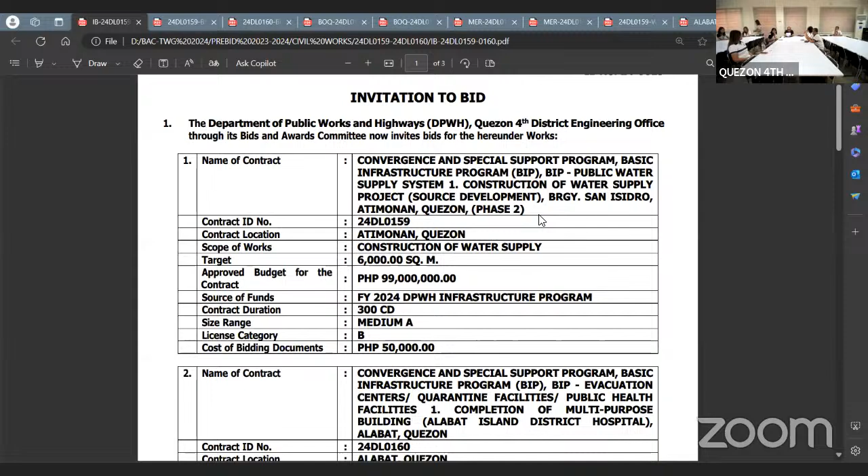Under contract ID 24DL0159 and 24DL0160. Majority of the members of the BAC are present. Ako pa ay online because of some reasons, pero they are online, as well as the representative from the contractors. Some are also online. So meron po tayo today to proceed with this activity efficiently.

So to hear the details of the projects, kanya po natin si Engineer Brian to discuss the details. Good morning for this day, pre-bid conference. Meron po tayong two projects for this invitation.

First contract ID 24-0159, Convergence and Special Support Program, Basic Infrastructure Program (BIP), BIP Public Water Supply System. Construction of Water Supply Project, Source Development, Barangay San Isidro, Atimonan, Quezon, Phase 2. Scope of work: construction of water supply, target 6,000 square meters. Approved budget for the contract of 99 million pesos. Source of fund: FY 2024 DPWH Infrastructure Program. Contract duration: 300 calendar days. Size range: Medium A. License category B, and cost of bidding document: 50,000 pesos.

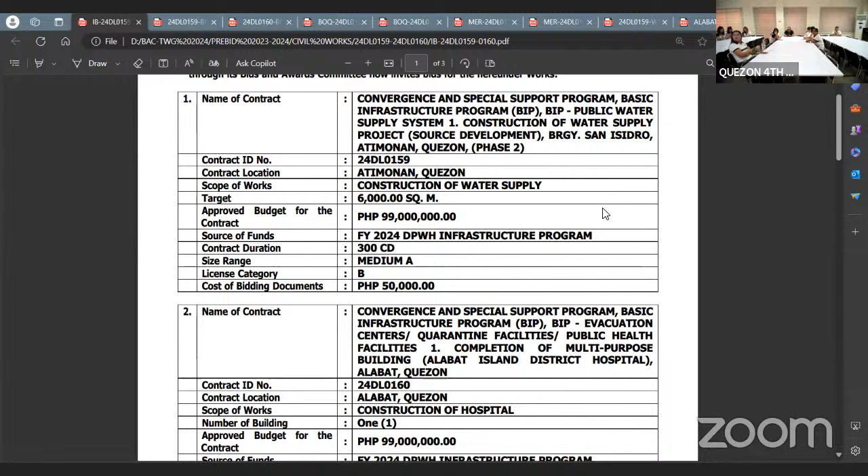Then second project, contract ID 24-0160, Convergence Special Support Program, Basic Infrastructure Program (BIP), BIP Evacuation Center, Quarantine Facilities, Public Health Facilities, Completion of Multipurpose Building, Alabat Island District Hospital. Scope of work: construction of hospital, number of buildings: 1. Approved budget for the contract of 99 million pesos. Source of funds: FY 2024 DPWH Infrastructure Program. Contract duration of 360 calendar days. Size range: Medium A, license category B, and cost of bidding document of 50,000 pesos.

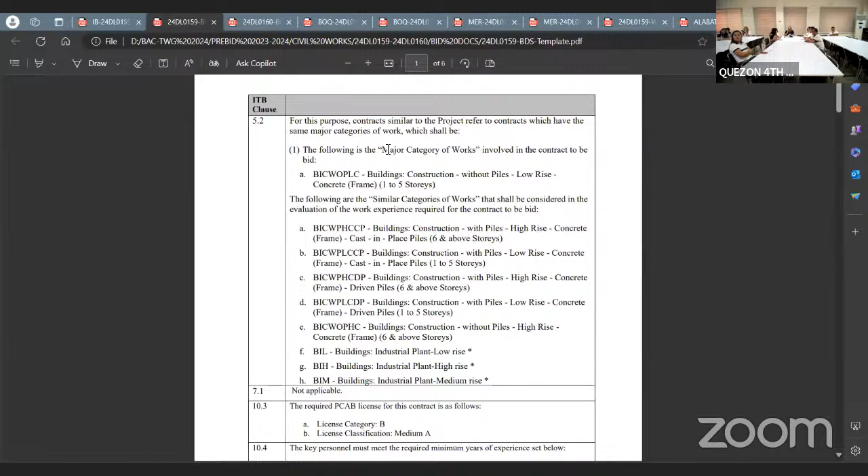So dalawa lang po yung project natin. Unahin po natin yung ating 24-0159. So for the major categories of work: building construction, without piles, low-rise, concrete frame, 1 to 5 stories. Ang major categories po is concrete frame na building construction, 1 to 5 stories.

Then for other similar categories: building construction with piles, high-rise, concrete frame, cast-in-place piles, 6 and above stories. Building construction with piles, low-rise, concrete frame, cast-in-place piles, 1 to 5 stories. Building construction with piles, high-rise, concrete frame, driven piles, 6 and above stories. Building construction with piles, low-rise, concrete frame, driven piles, 1 to 5 stories. Building construction without piles, high-rise, concrete frame, 6 and above stories, and building industrial plant, low-rise, medium-rise, and high-rise. So ito pong 24-0159 ay concrete frame ang ating required na category.

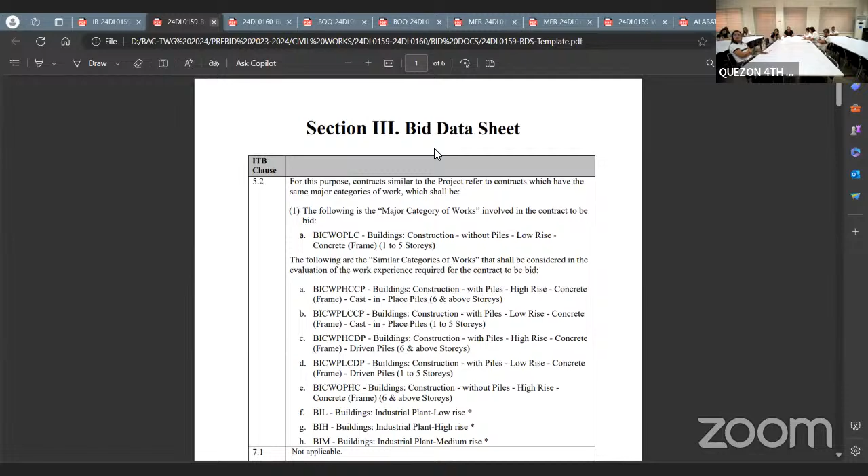Then for 24-0160, for the construction of hospital: building construction without piles, low-rise, steel frame. So steel frame naman po yung ating 160. So sa category ng project listed doon sa ating contractor information ng CRC.

So may mga bidders po tayo na pwedeng mag-fail, mislok po nila yung category kung steel po or kung concrete. So pa-double check na lang po doon sa mga interested bidders na sasali. So ating 24-0160 for the construction hospital is steel frame.

Then for the similar category: building construction with piles, high-rise, steel frame, cast-in-place piles, 6 and above stories. Building construction with piles, low-rise, steel frame, cast-in-place piles, 1 to 5 stories. Building construction with piles, high-rise, steel frame, driven piles, 6 and above stories. Building construction with piles, low-rise, steel frame, driven piles, 1 to 5 stories. Building construction without piles, high-rise, steel frame, 6 and above stories, and building industrial plant, low-rise, medium-rise, and high-rise.

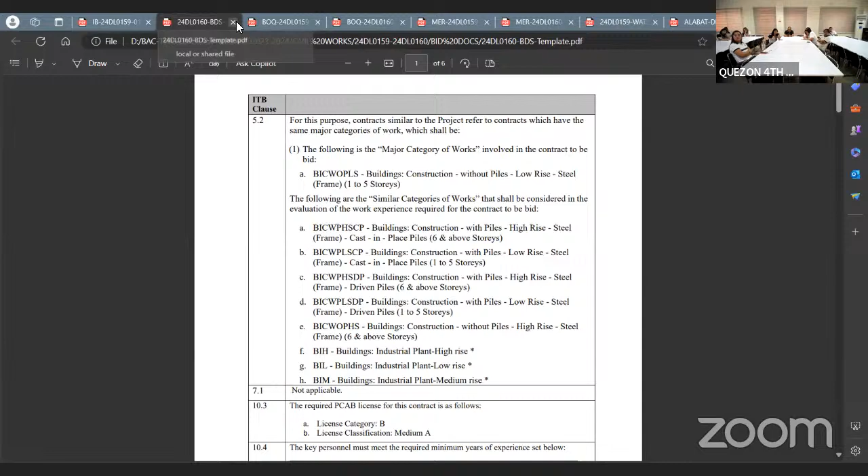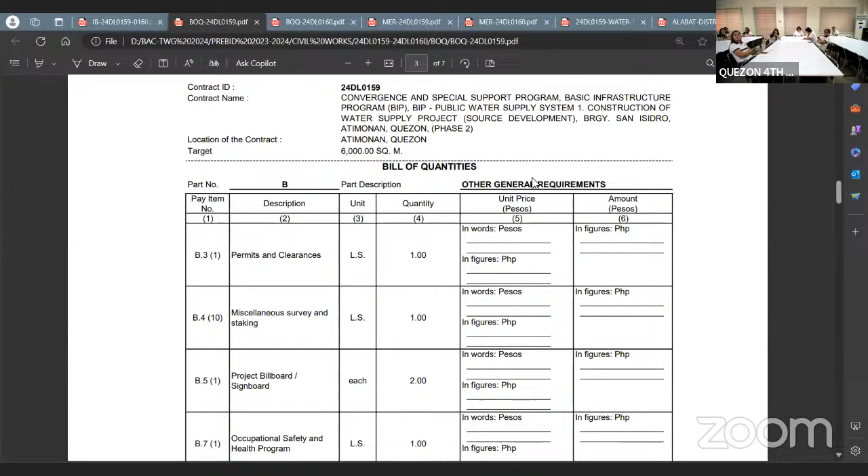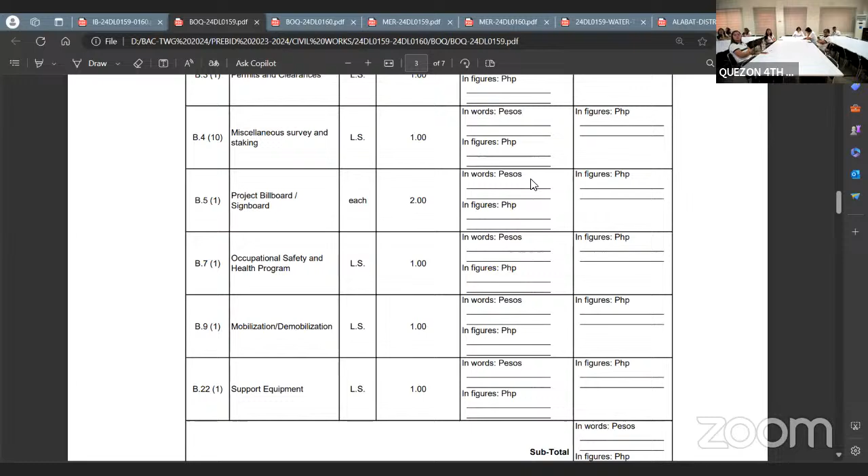Then for Part B, other general requirements: permits and clearances, miscellaneous survey and staking, project billboard, signboard, occupational safety and health program, mobilization and demobilization, and support equipment. Then for Part C: clearing and grubbing, removal of structure and obstruction, structure excavation common soil, embankment from roadway, structure excavation common soil, embankment from borrow common soil, then gravel fill, and site development.

Then Part D, reinforced concrete: structural concrete 3,000 PSI, Class A, 28 days, lean concrete, reinforcing steel deformed grade 40, and forms and false works.

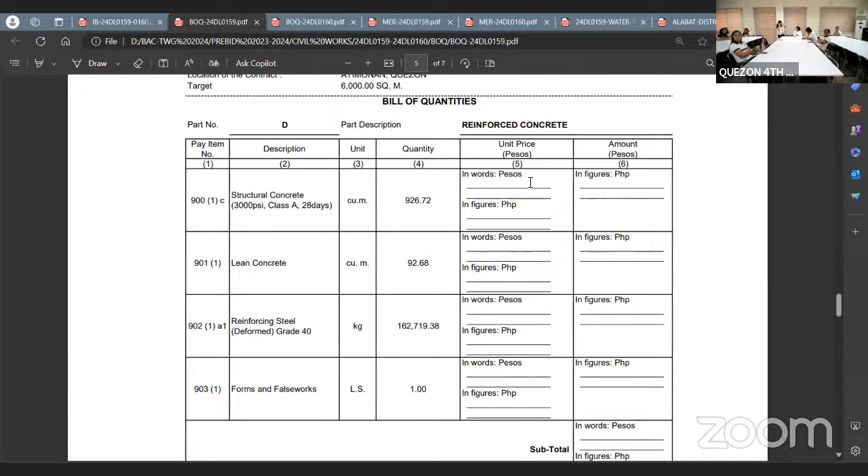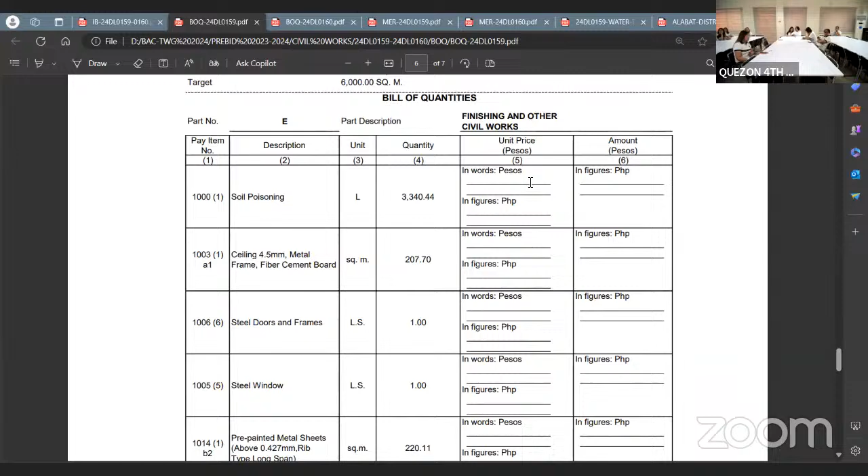For Part E, finishing and other civil works: soil poisoning, ceiling 4.5 millimeter metal frame, fiber cement board, steel doors and frame, steel window, pre-painted metal sheet above 0.427 millimeter rib type long span, waterproofing cement base, cement plaster finish, painting works, masonry, concrete, painting works, wood and painting works, steel.

Then stage beam and load bearing, including reinforcing steel, 100 millimeters, steel, structural steel trusses. So that is our requirement for 24-0159. Complete frame for our 24-0159. Then for the construction of hospital, contract ID 24-0160.

For the summary of bid prices: Part A, facilities for the engineer; Part B, other general requirements; C, earthwork; D, reinforced concrete; E, finishing and other civil works; F, electrical; and G, mechanical.

Part C, earthwork: removal of structure and obstruction, structure excavation, common soil, foundation fill, gravel fill and soil, and site development.

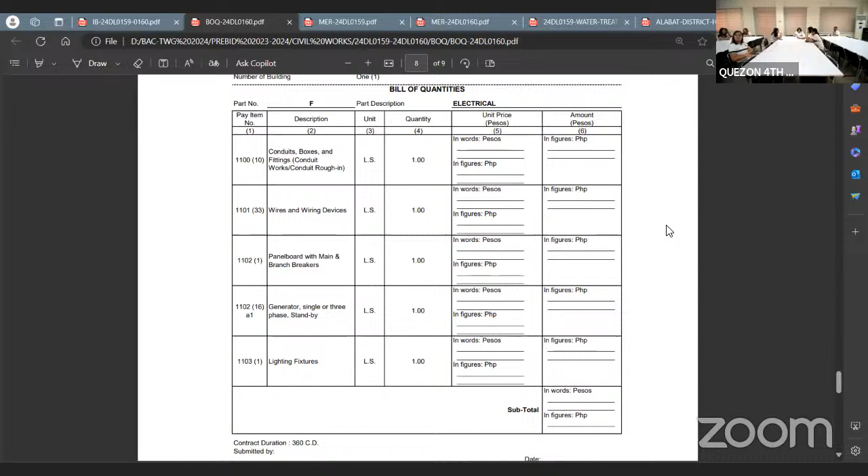And for the mechanical, Part G: automatic fire extinguisher system and fire alarm system. So now let's proceed to the minimum equipment requirements.

For minimum equipment requirement for 24DL0159: backhoe, bar bender, bar cutter, bulldozer, concrete vibrator, crane, dump truck, motorized road grader, one bagger mixer, payloader, plate compactor, pump, grout and concrete, trailer mounted, service vehicle, truck,

vibratory roller, water truck, welding machine, minor tools, and minimum testing equipment per D.O. 11 Series of 2017.

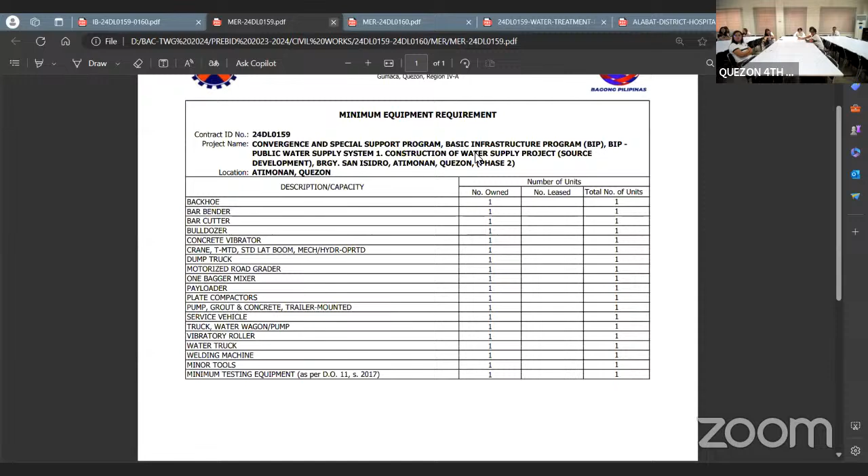Then for the minimum equipment requirement for 24-0160: backhoe, bar bender, bar cutter, concrete vibrator, dump truck, one bagger mixer, plate compactor, pump, grout and concrete, stationary, service vehicle, water truck, minor tools, and minimum testing equipment per D.O. 11 Series of 2017.

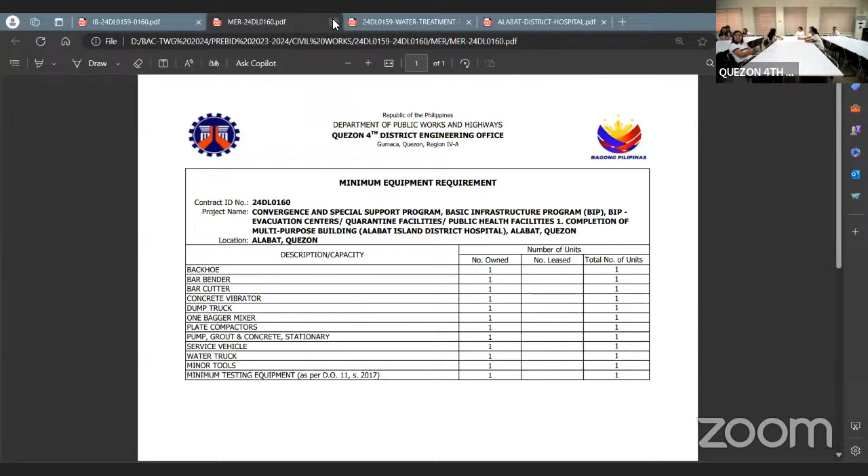Then for the plans: plan for 24-0159, construction of water supply source development project, Barangay San Isidro, Atimonan, Quezon, phase 2, floor area of 6,000 square meters.

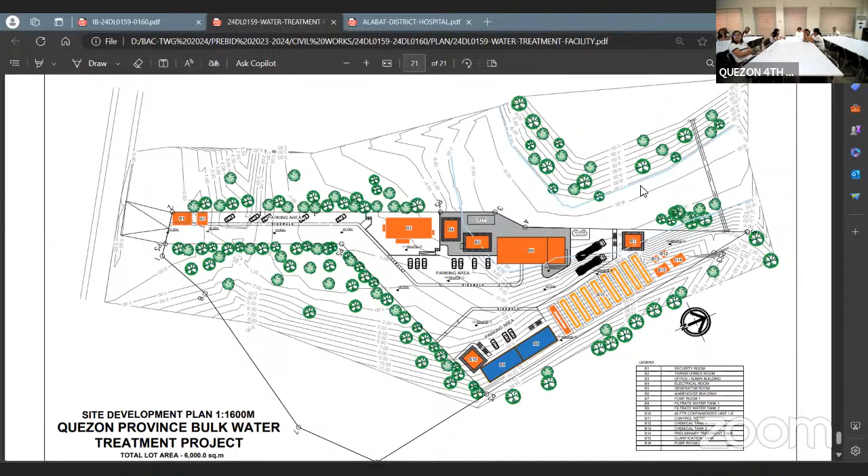That is for 24-0159. Then for 24-0160: completion of multipurpose building, Alabat Island District Hospital, Alabat, Quezon, per floor area of 3,762.52 square meters.

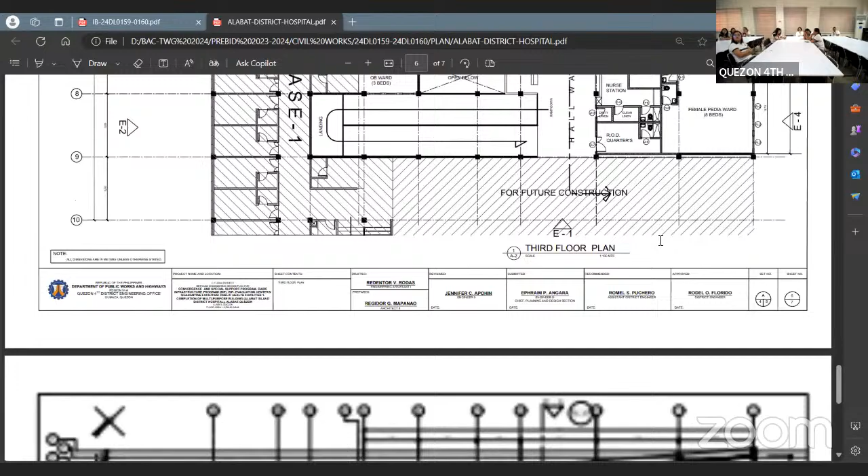So, next, shall we proceed to other matters?

Number 1, all notarized documents should be attached with documentary stamp. Any missing documents will be grounds for outright disqualification. The BDS will specify the form and paper size for the bidding documents; our required paper size is A4.

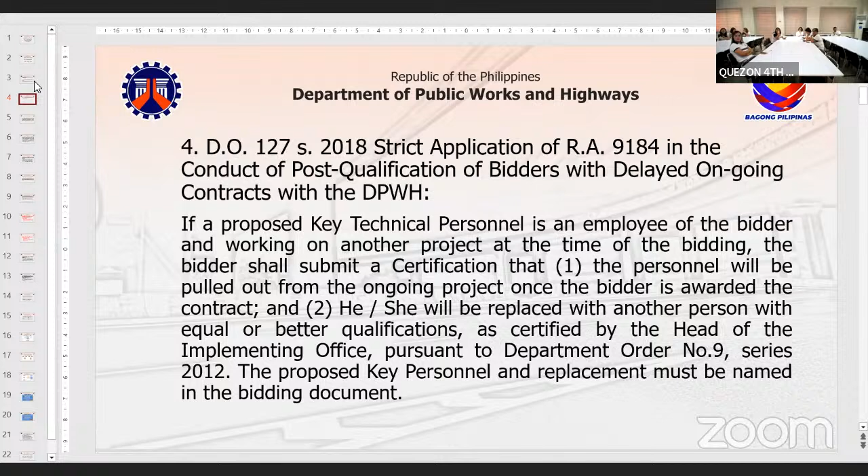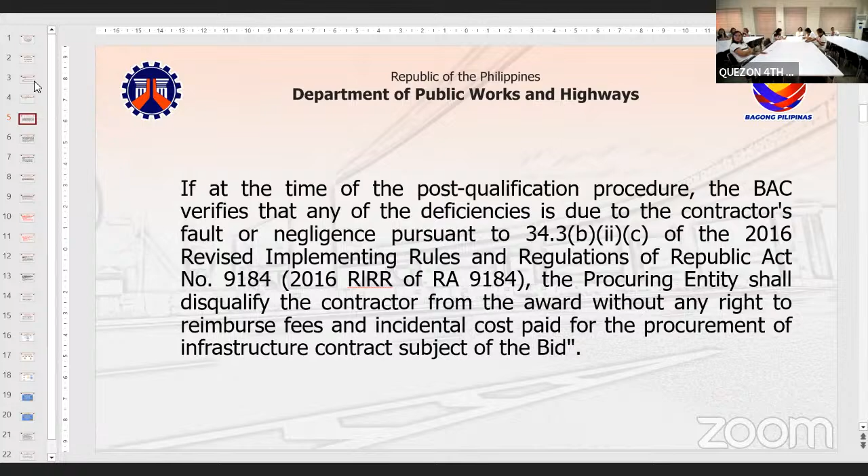So if at the time of the post-qualification procedure the BAC verifies that any deficiency is due to the contractor's fault or negligence, pursuant to Section 34.3 of the 2016 Revised Implementing Rules and Regulations of RA 9184, the procuring entity shall disqualify the contractor from the award without any right to reimbursement of fees and incidental costs paid for the procurement of infrastructure subject of the bid.

If the grounds for disqualification are based on the above requirements, the concerned BAC shall issue a notice of disqualification to the bidder with the statement that DPWH shall not qualify your bid for any of its projects until and unless the reason for your disqualification has already been cleared by the concerned implementing office.

Upon presentation of the required documentary evidence, the concerned implementing office shall issue certification if the contractor has already eliminated the negative slippages and other deficiencies. However, nothing shall delay the procurement process of the concerned implementing office in accordance with the periods provided under the 2016 Revised Implementing Rules and Regulations of RA 9184.

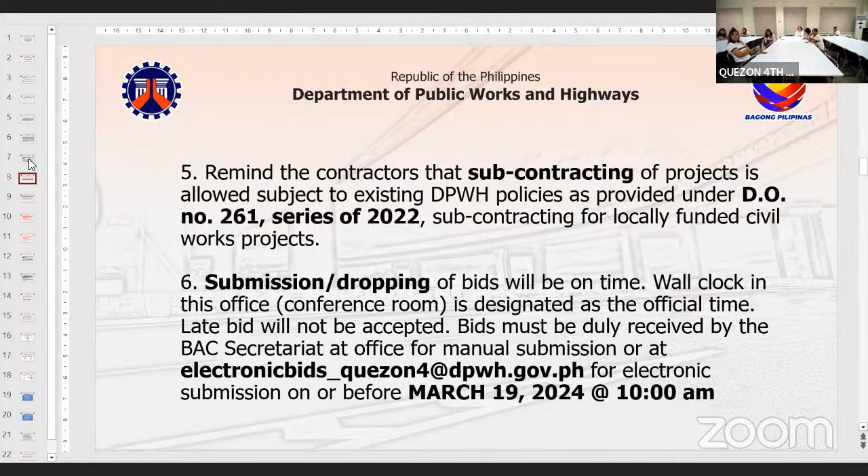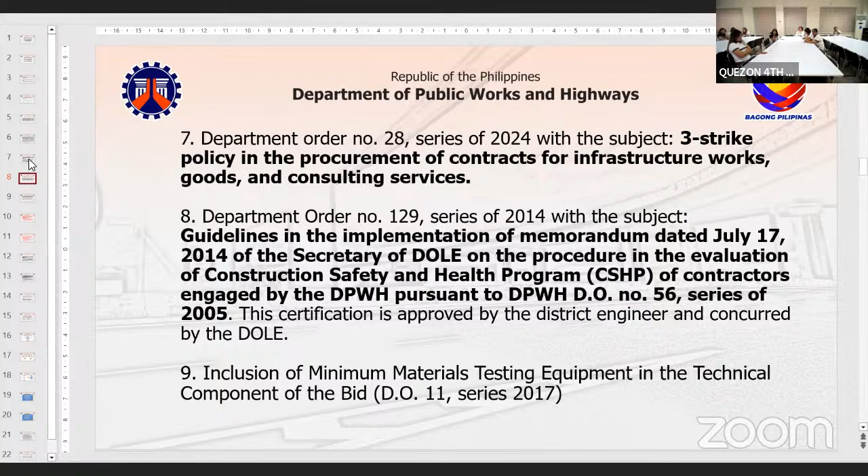Department Order 28 Series 2024 for the 3-strike policy. Department Order 129 Series 2014 for the CSHP. Department Order 11 Series 2017 for minimum materials testing equipment as part of the technical components of the bid. Mayor's permit as part of eligibility processing. Department Order 133 Series of 2015 for the adoption of the precedence diagram method.

For transparency and accountability, previously Department Order 105 Series 2020, we no longer have our Facebook live stream. So all procurement activity, pre-bid conference, and bid opening are now live streamed on YouTube, on our DPWH Quezon 4th DEO YouTube channel. This is under Department Order 6 Series of 2024.

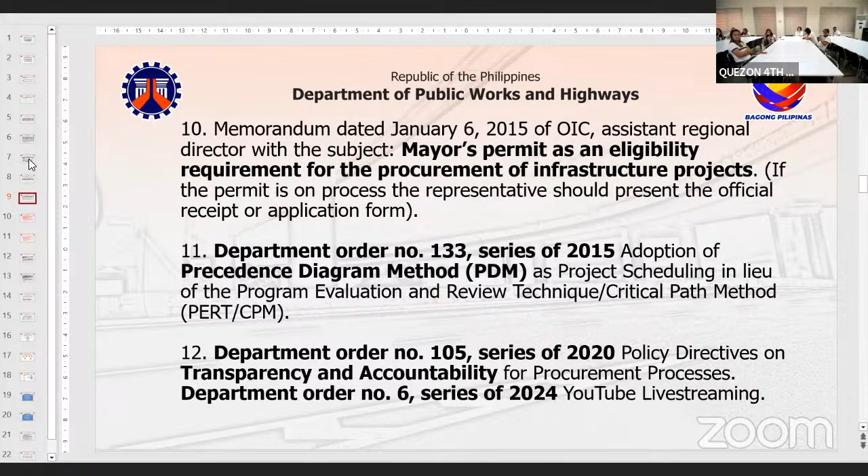Department Order 87 Series 2020 for electronic submission and receipt of bids. Then, without prejudice to the provisions of RA 3019 and other penal laws, penalties and offenses shall cover all types of procurement, whether done manually or electronically, pursuant to Rule 21 of the Penal Clause, Section 65 of Offenses and Penalties of the 2016 Revised Implementing Rules and Regulations of RA 9184.

Then, Department Order 10 Series 2015 for ICT turnover and disposal. For bidders who want to request a site inspection, please coordinate with Engineer Ray and Engineer Kevin for the schedule of site inspection.

All prospective bidders or their representatives must present their contractor information together with their company ID. An authorization letter should not be accepted.

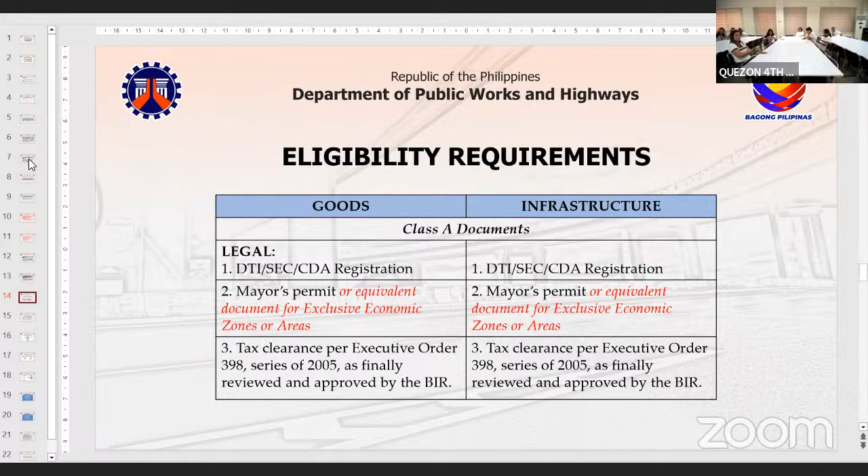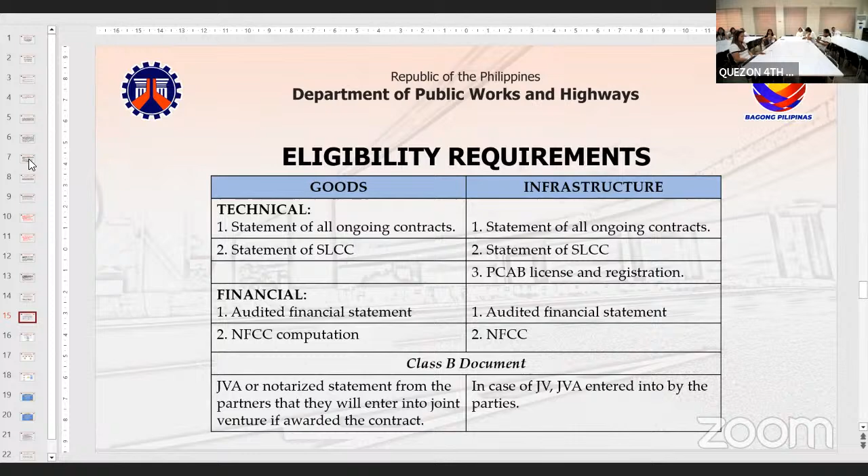For the eligibility requirements: DTI, SEC, CDA, mayor's permit, tax clearance, a statement of all ongoing contracts, statement of SLCC, audited financial statement, and NFCC. In case needed, a joint venture agreement or the Class B document.

For the sealing and marking of bids, the first envelope should only contain the eligibility documents and technical requirements. The second envelope contains the financial proposal. All envelopes must be properly labeled with the name of the contract to be bid, name and address of the bidder, the procuring entity, and 'do not open before' March 19, 2024, until 10 a.m.

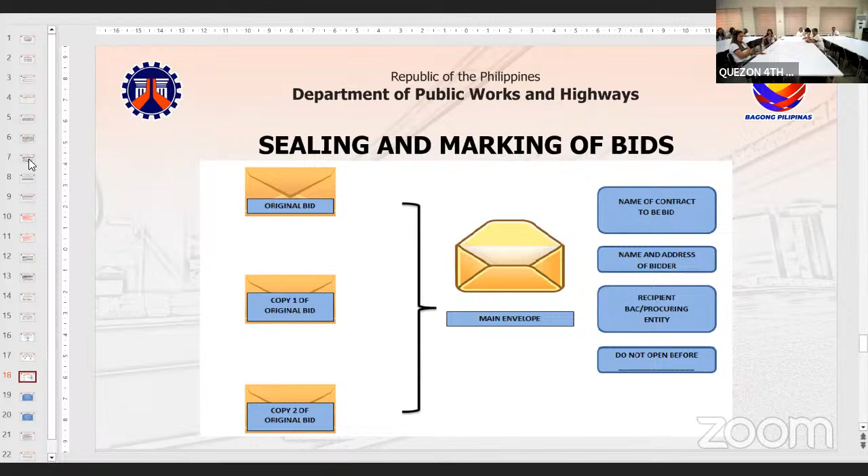For electronic submission, this is under DEO 87 Series 2020. All bids must be in PDF format and all folders must be password protected.

Advisory to our valued clients: this office is implementing a no appointment, no entry policy. Clients including bidders should schedule their visit at this address and submit the accomplished form to the office concerned at least one day before the scheduled meeting through the email address DEO@yahoo.com.ph. Forms for visitor's pass will also be provided at the front desk guard for walk-in clients, but entry will still depend on the approval of the office concerned.

The Department of Public Works and Highways, Quezon 4th District Engineering Office, reserves the right to reject any or all bids, declare a failure of bidding, or not award the contract at any time prior to contract award, in accordance with Section 35 and 41 of the 2016 Revised Implementing Rules and Regulations of RA 9184, without thereby incurring any liability to the affected bidder or bidders.

Any other questions?